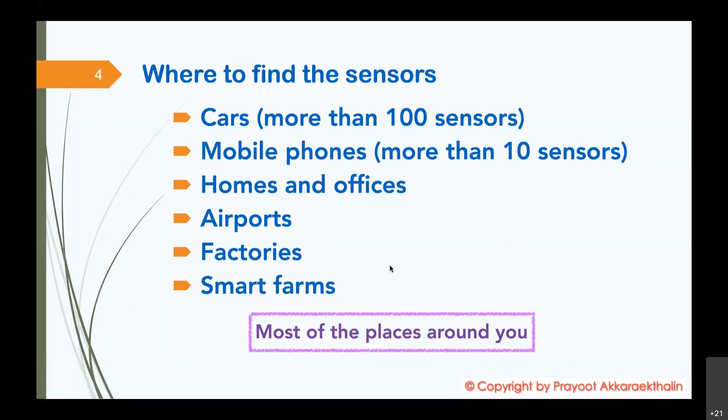You can see a lot of sensors around you: in your car, more than 100 sensors; in your cell phone, more than 10 sensors. In your home and office, for example in air conditioners and refrigerators, there are many sensors. Also in airports, factories, and smart farms. So you can see the sensor is very important, and that's why we are working on sensor technologies.

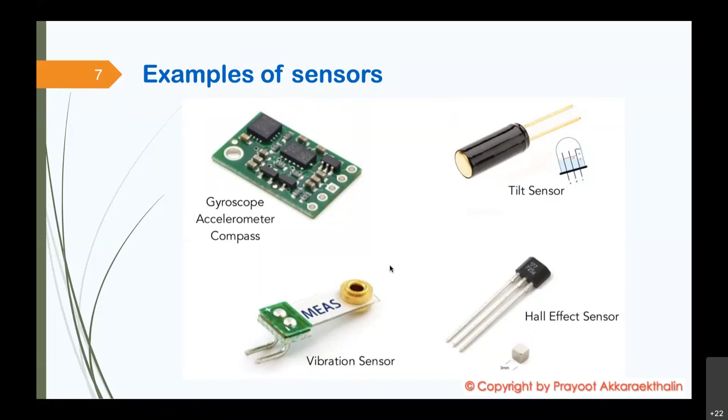So why do we need to work on electromagnetic-based sensors? Because the previous sensors I showed you all work on what we call a normal quantity of electricity, for example measuring electricity, capacitance, or resistance, and converting that to an electrical signal. That's the kind of conventional sensor.

The conventional sensor cannot do some jobs. For example, for long range applications, if you need to measure an object far away from the observation point, you cannot do that unless you run some electrical wire to bring the signal from the sensor to the observation point. For some applications, including high temperatures, you cannot put the sensor into a furnace, it will be destroyed. For some toxic areas, and also applications with a small amount of physical quantity, we have limitations with those kinds of sensors.

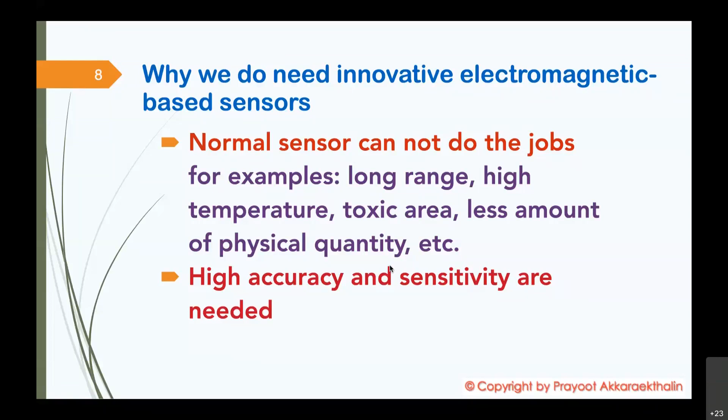Also, accuracy and sensitivity are very important for measuring in some applications, and those conventional sensors have relatively low accuracy and sensitivity.

I would like to introduce our group from Thailand. We got funding from the Thailand Research Fund from 2017 to 2020, and we study innovative sensor technology using electromagnetics. We have 9 researchers, I don't need to mention all of them here, and I guess some of them are also in this room. We have about more than 15 assistant researchers and graduate students.

We have a big project, and within the big project we have some sub-projects. For example, we have sub-projects for metamaterial-based gas sensors, nanofluidic sensors, waveguide sensors for material characterization, motion sensors, moisture sensors, GPR, and also RFID, including systems with IoT and wireless sensor networks.

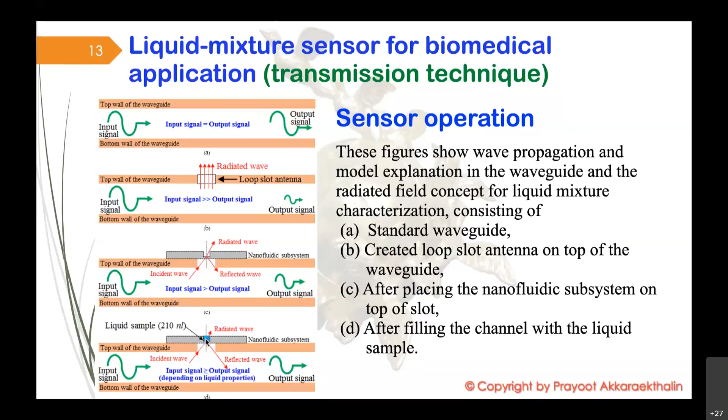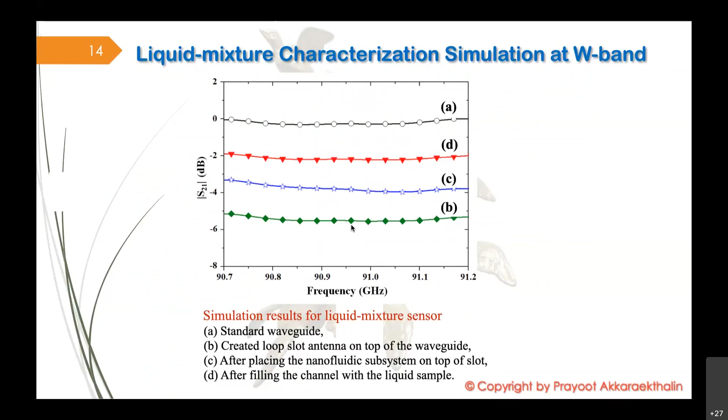And then we do some measurement. We design the sensor with a frequency of about 90 gigahertz, which is quite high. So we had to take this sensor to measure at the University of Leeds because they have the equipment to do this.

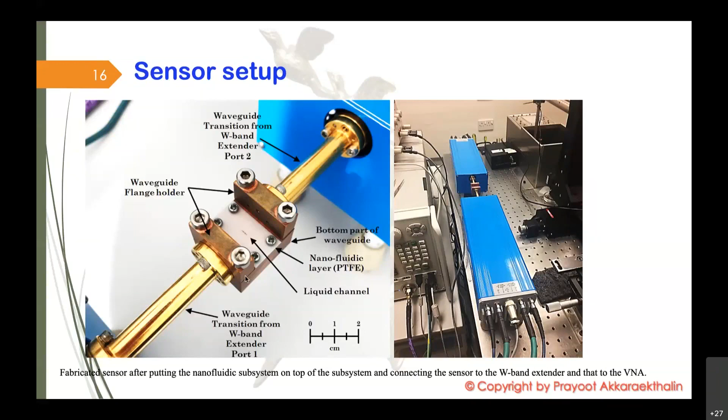And then we have the results here. The dots are the measured results. On this side is the percentage of ethanol—we use ethanol with DI water, mixing ethanol at different amounts or percentages into the DI water. You can see here from 0 to 100% ethanol, and we measure the value of delta S21.

And then we have all the data from the measurement. The red line is a fit plot, because when we finish designing this sensor, we need equations to use for future applications. That's why we need to fit the plot. The equation for the fitted plot is shown on the right-hand side here.

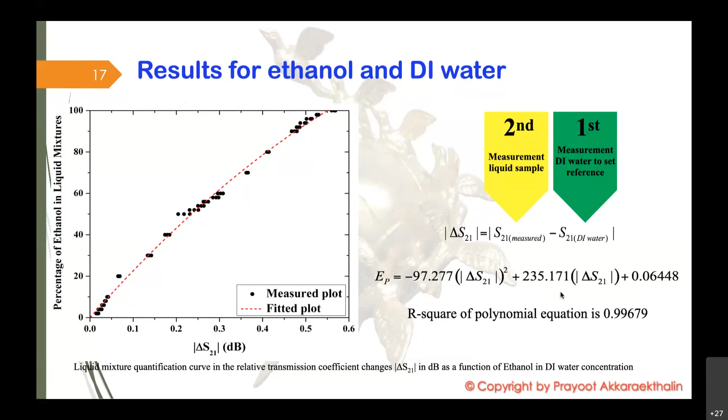So for the first sensor, we compared it with previous work in the literature. We found that our sensor has quite high sensitivity—about 2% sensitivity. The complexity is very low; you see it's just a piece of waveguide. We can make it reusable—we just change the nanofluidic subsystem.

So the reusability is very good, and also the cost is low, except the equipment, because this is kind of a prototype. When we make it for real application, you also need to design all the system with low cost. But now it's just a prototype, so we use equipment in the lab. I don't need to go into detail in the remarks because I've spoken out all the detail already, so I'll just skip this one.

Let's move to the second one, the surface height sensor for photoresist film measurement. This one uses the technique of reflection, meaning we measure the reflected signal and use resonance technique as well. So we developed a non-invasive sensor to accurately measure the thickness of photoresist film on the clear glass that's used for electronic process.

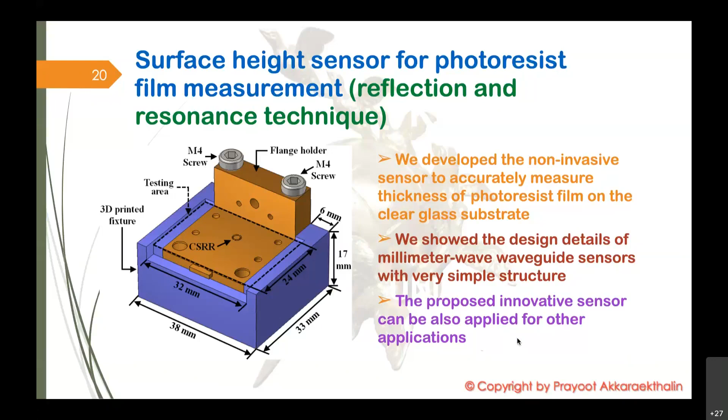We'll show the design in detail. We use a really high frequency in millimeter wave, so this will be useful for electronic process applications.

As you know, when you do some process of electronic devices, you have to put the photoresist on top of the wafers. This time we use glass wafers. The process here is we put the photoresist, SU8, on top of the clear glass and then spin until we get a kind of thin photoresist. The substrate has some properties here - SU8 has a value of permittivity. So for this project, we need to measure the thin film thickness here.

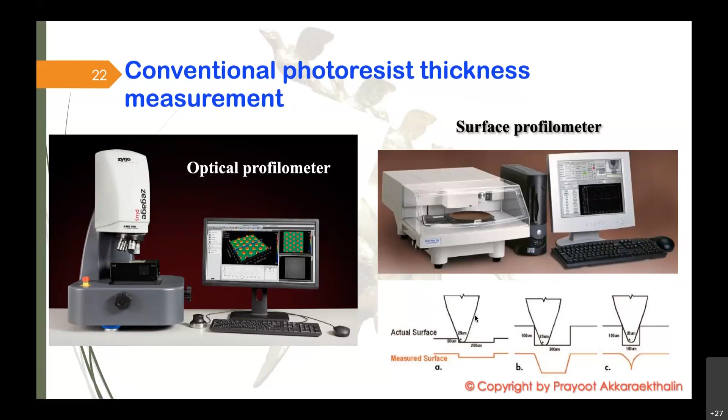Actually, we have some instruments to measure this kind of thickness. You may use optical profilometers, but the thing is, because this time we use clear glass, you may get some errors because it uses optical signals. The second one is you can use mechanical methods - you have a tip, and you can scan the tip on the surface of the photoresist. Also, the disadvantage of this instrument is it may destroy your photoresist somewhere on the glass wafer. That's why we have to make these sensors.

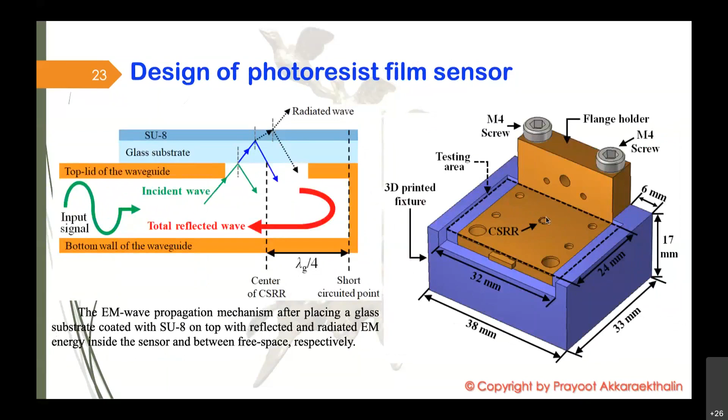We may go into some details. Going back to the structure here, on the hole we put a split ring resonator on top. The structure here is the split ring resonator - it cuts a hole to allow the signal to pass through to the photoresist.

So we studied this and then fabricated these sensors. You can see a piece of waveguide here, and on top we have the top lid with the hole, or split ring resonator - a circular split ring resonator here - and we make a short here, and this part is the input of the waveguide. We put a support here.

For the simulations of the photoresist, we measure the reflected signal, but at a different frequency, because when you put the glass wafer with photoresist on top of the waveguide, the signal reflected back shows some frequency shift - the SU8 photoresist changes the resonant frequency of the reflected signal. So the thickness of SU8 correlates with the variation of delta F, which we measure as reflected back from the sensor. This shows you the graph from the simulation.

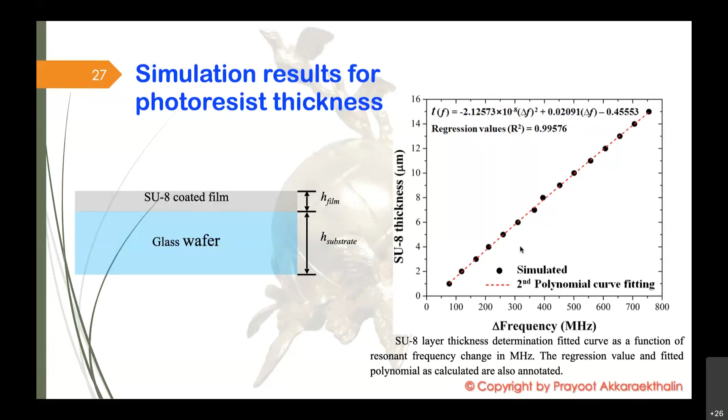So we did some experiments again. The frequency is quite high, about 80 gigahertz. We did this at the University of Leeds again.

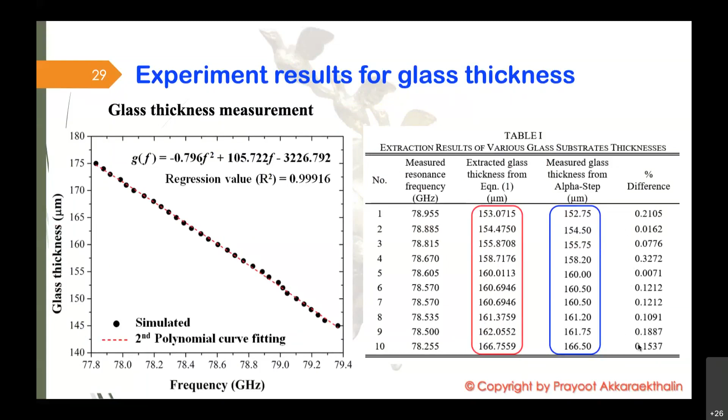From the experiment, comparing to the equations, we found that if you take a look here, this is the glass thickness - only the glass wafer thickness - compared to the equations. Let's show the equations from simulations and from measurements here. It's very close - we have only a very small difference between the simulation and measurement results. This also shows you the experimental result of the photoresist thickness.

So we move to the next sensor. This one we call a sodium chloride solution sensor, which may apply for industrial and biomedical applications. This time we use a resonant technique, again with a reflected signal.

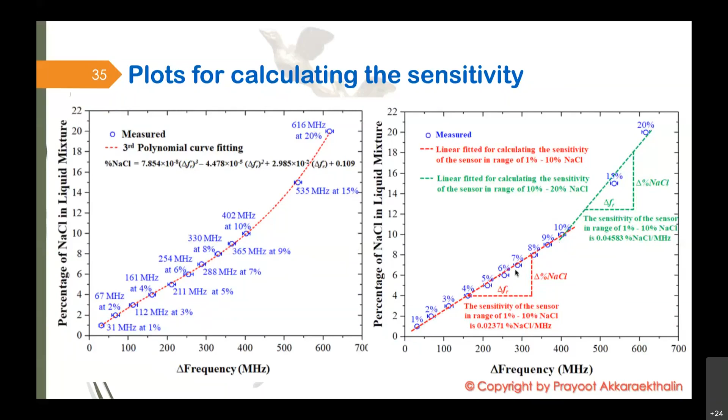From this sensor, we found that for the percentage of sodium chloride discrimination, we can get down to 1%. That's very good compared to previous work, and also the sensitivity is really high. Fabrication cost is quite low, and it has many good advantages compared with previous work.

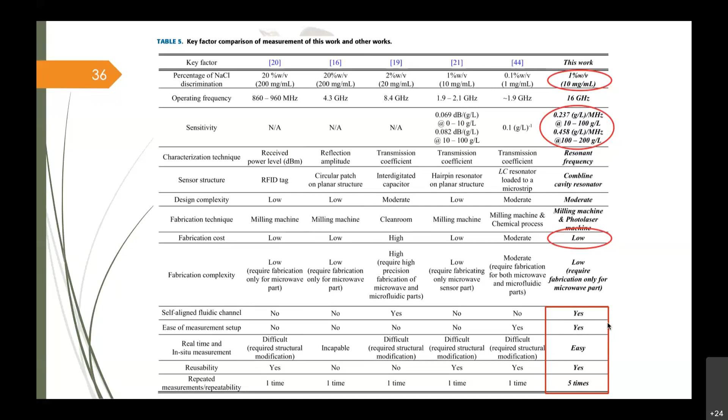So we finished 3 sensors, waveguide sensors. I think I have about 10 or 15 minutes left, so I'll go more quickly.

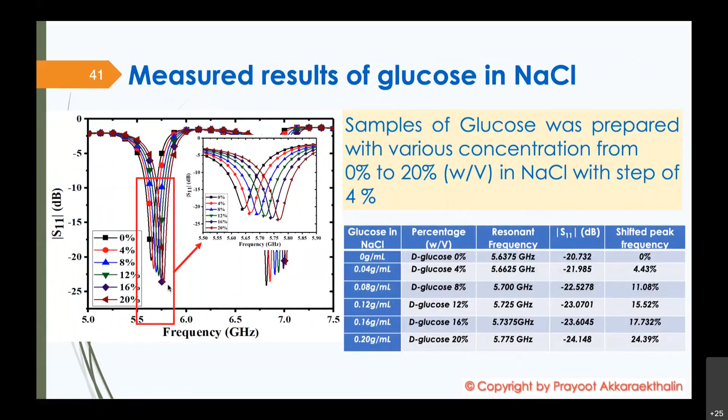Again, we can see the result here. The resonant frequency shifts depending on the amount of glucose. I won't go into detail for this one, just show you we also work on planar circuit sensors.

So we come to the last sensors, we call them rice paddy moisture sensors. Very important for Thailand because we are the number one rice exporter, milled rice export. Most of the agriculture area in Thailand, we grow rice.

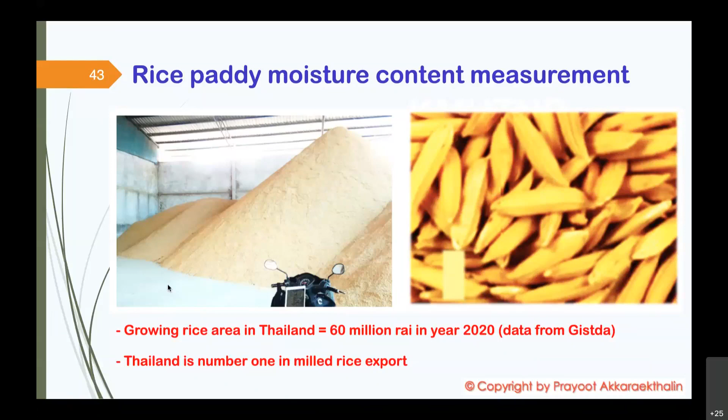So we need a sensor for agriculture and also for post-harvest processing. We will use a sensor for post-harvest processing. When we get the rice from the farmers, the moisture content in the paddy rice is very high, maybe up to 30%. We have to reduce it before making milled rice.

This card shows you the diagram of factories. We have a silo that will dry the rice. We put hot air into the silo and flow the rice from the top down to the bottom, again and again, until you get the moisture below about 10 or 12%, which you can use for processing milled rice.

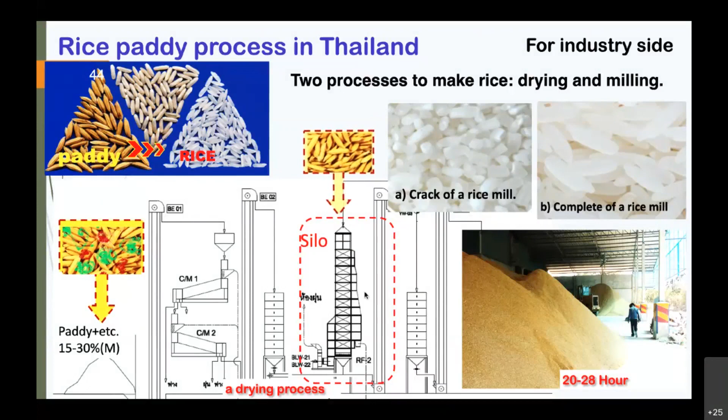So I'll go quickly. About 11%. Let me show you the picture of factories, the milled rice factory in Thailand. The right hand side shows a guy working on this project.

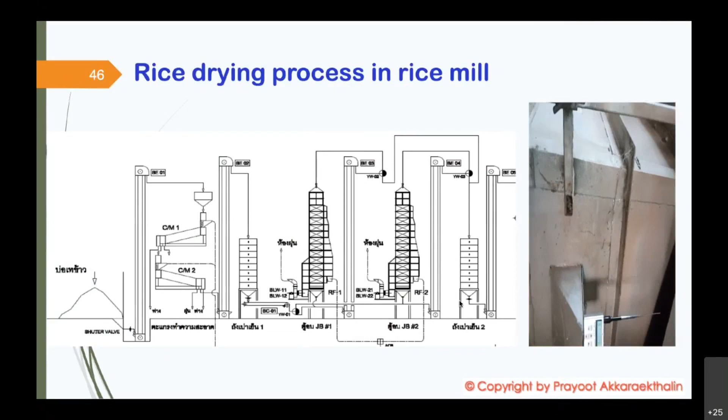I'll show you, we need to make the moisture content sensors work in process and real time, and we need to measure the data, put the data of moisture content via IoT. That's why we're working on this. We hope this will make the process for making milled rice more accurate.

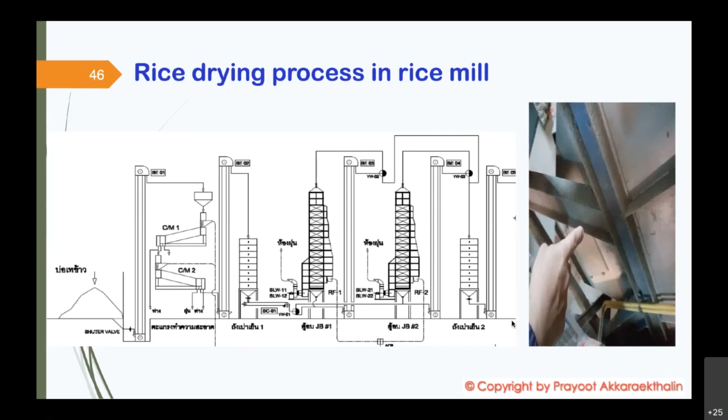Quickly, I'll show you some pictures of rice. If you decrease the amount of moisture content, from 20 to 14 you see more crack, right? Down to about 10, you see more crack here. So you have to be careful. If you reduce moisture more, you get more cracks, and that will destroy the milled rice, giving you a lower price for your rice.

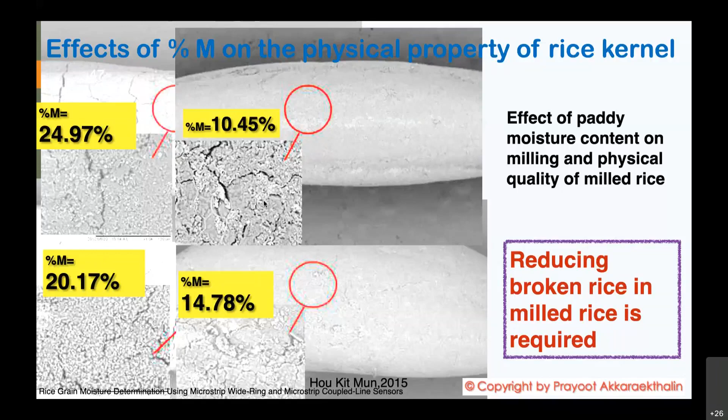Today we have standard tools to measure moisture content. We can use the capacitance technique, we can use a resistive technique. But with this tool, you have to take a sample from the silo and measure it outside, so you may get some error when you take the rice away from the silo.

So that's why we need to put the sensor just in the process, beside the silo, so we can measure accurate moisture content data and also monitor in real time.

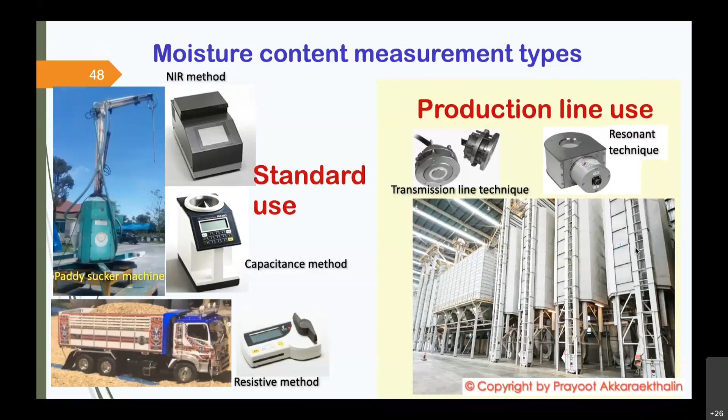Not smooth, wait a minute. Too slow. I'll go quick, but it does move fast. Okay, no problem, just some minutes and I can finish.

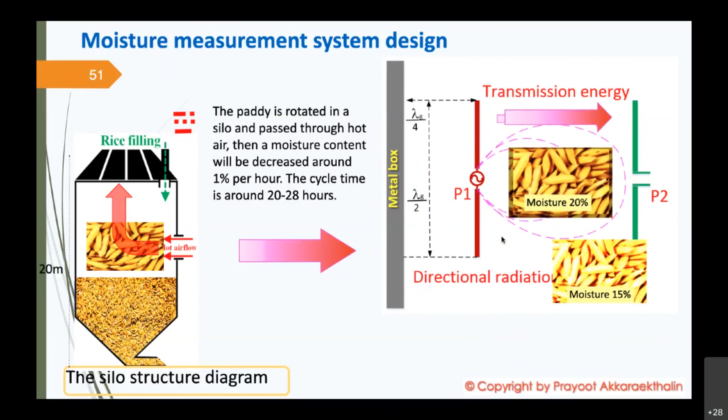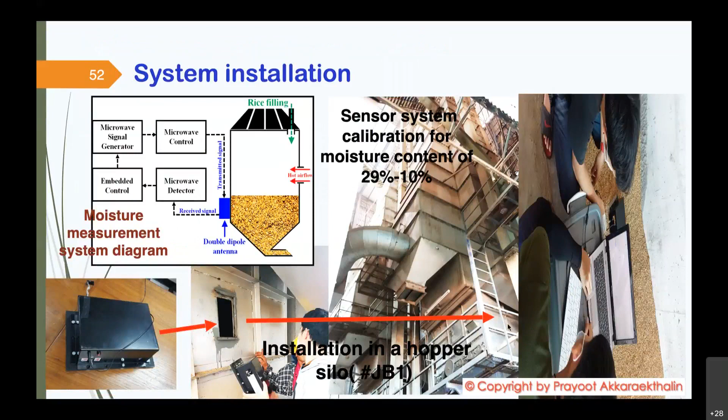Okay, this shows you the real system we put here. I'm sorry, somewhere here. I'll go quick so you can see how it operates, right? This shows you the real sensors.

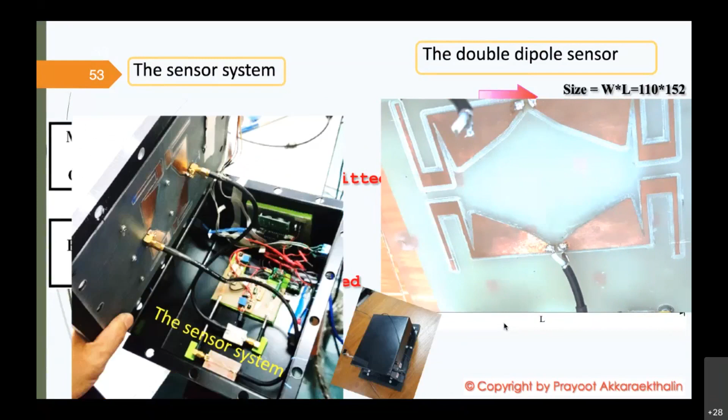Sensor system here. We measure the results of moisture content from the sensors and compare with the standard tool, and we have some curve for our system fitted from the measured data. So we compare here with standard tool, right?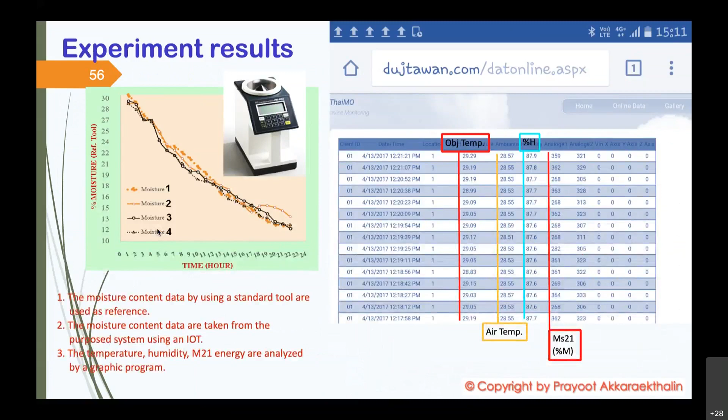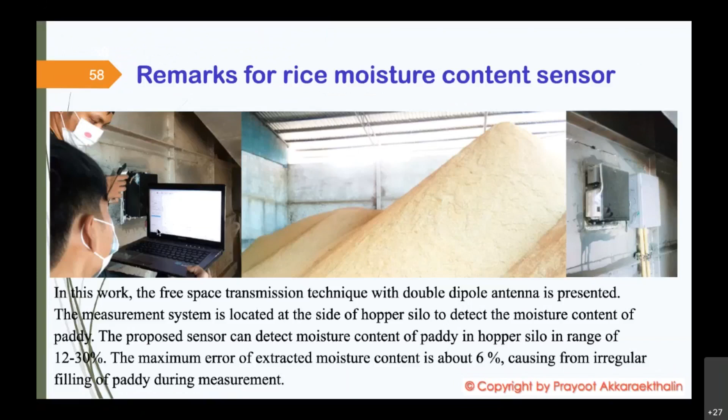We get some difference, we don't call it error. We got some difference with standard tool about 6%. So I would finish here, because the last one we use the same technique

of moisture content sensor to measure the moisture of soil at the restoration of a historic place in Thailand. But it's the same technique, so I'll go quick.

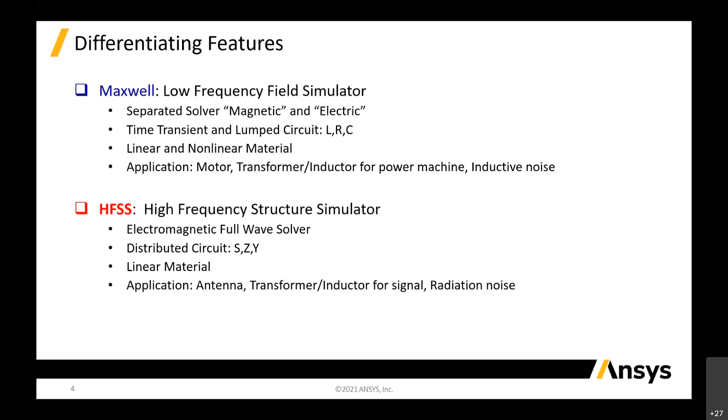So let's focus more on the applications we're going to introduce today. I'm going to introduce a sensor, an electromagnetic device that uses a magnetic field for sensing, where we detect the magnetic field of the sensing part from the coil. From there we analyze the different types of induced current, induced inductance, and how this data is processed, using our circuit tools and system tools as well.

Okay, I'll introduce it when we go on.

Velocity sensor for anti-lock brakes and stability control. Position sensor for static seat location. We have eddy current sensor for flaw detection, where you can have a sensor to detect cracks on surfaces. That's very important, where applications can be like aircraft or space shuttle. You need this sensor to actually detect cracks. If there are cracks on the surface of the aircraft, it's going to be a disaster when you fly out of the atmosphere, or the high pressure can cause disaster type accidents.

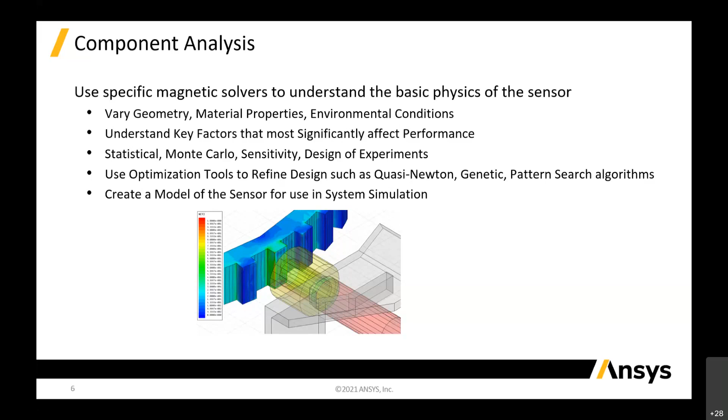So basically we have something called sensor design suite, where there's a series of related solutions that can assist engineers to design and analyze electrical machines. We have things like libraries and all that to support the type of design that engineers or the company require. Then we can integrate this whole thing.

It's a single platform that integrates circuitry, electromagnetic, and system engineering into one environment. We call it electronics desktop. It's just a single environment where you can call in all these components, like the way you design your structures, your device in Maxwell. You can actually connect them into circuit and all this. So it's actually all fully integrated.

Then the solution that we provide for low frequency, as I mentioned, we have Maxwell 2D and 3D. It depends on the structures, because you might want to start out with 2D, since the electromagnetic field is basically static, in one axis or two axes. So you can start out with 2D to try to analyze it and see the effect for your design. Then you can easily convert that 2D into 3D inside the solver itself, so you can do that through and through.

Then, of course, from there you can do a steady state solver using DC or frequency domain, or transient dynamic solutions for time domain, handling all this time-induced eddy effect, because this is AC current when it comes to eddy effect. So you can have steady DC for the steady state solver, and for the dynamic solver we can use AC. These come with different types of applications for different types of solvers, so basically it's all in a single platform.

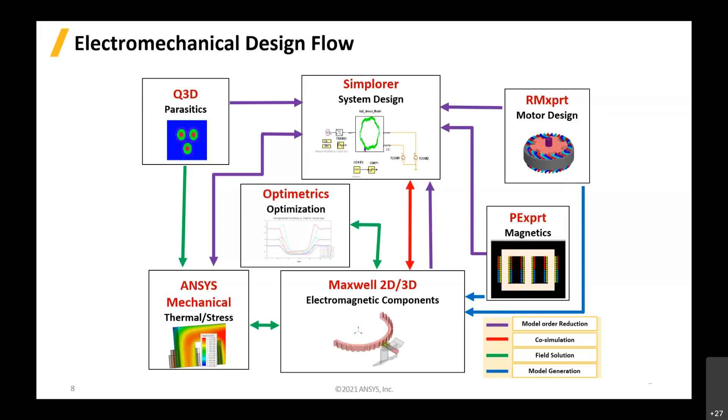We will have an example later on to show you what this looks like. These are just slides to show you how the system platform looks.

You see the Hall sensor models there, and the Hall sensor simulated in Maxwell is just a passive component. After you analyze whatever characteristics you want on your Hall sensor model, you can put it into Simplorer and run it with a simple current flowing through, seeing how the thing rotates and extracting out the magnetic field. So this system will be a subsystem for control of this Hall sensor.

Then this subsystem of the Hall sensor can plug into total simulations with feedback control - for example, this sensor might be for the rotating wheel of your vehicle, to measure the speed and all that stuff. We can put it into the system level, then analyze it and see how the sensor works on a real virtual rotation of the wheel itself.

Then we can have this rectifier circuit to power up the sensor. We know that a Hall sensor has an IC chip inside it - this IC chip, wherever you need it, is just for simple current sensing.

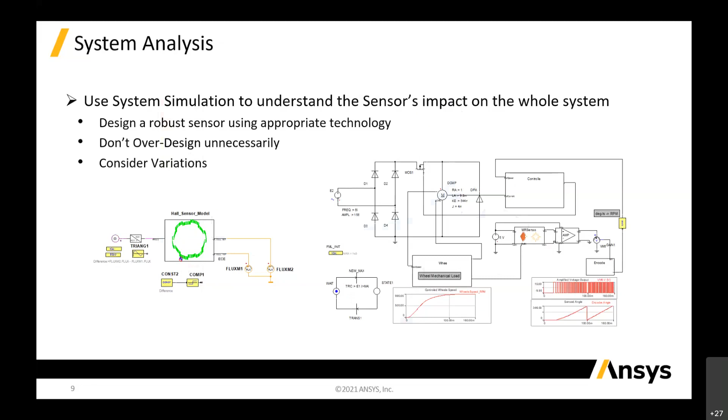Maxwell is a 3D solver, a solver that actually solves separately for magnetic and electric. There are two different solvers, and you can solve each of these solvers that you require for your applications.

Maxwell is very simple. You need to have your 3D structure imported into the solver, with the material characteristics that you assign. It's like the actual thing you design in the real world, and you just put it into the simulation.

As I mentioned, there are different types of solvers: electrostatic, magnetostatic, eddy current - three types of solvers inside Maxwell. Depending on your sensor's behavior or characteristics, you can use different types of solvers. There's also transient electric, and the last one is transient magnetic. These are all AC, DC and AC, but with separate solvers for electrostatic and magnetic - one is to analyze voltage, the other is to analyze current.

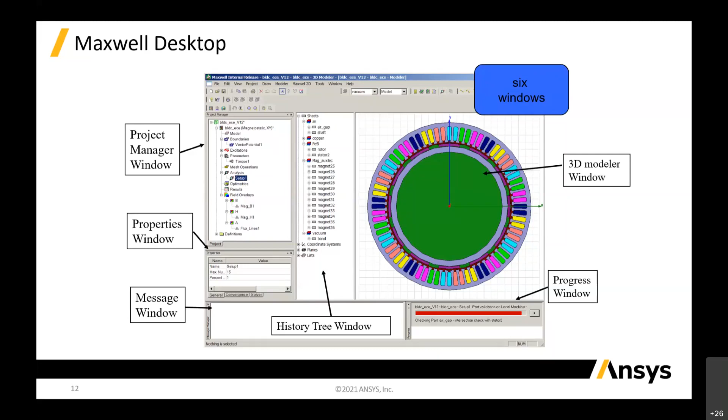For 3D solver simulations, the most important things are your geometry and your material. After that, you just assign boundary conditions and excitation, and it's that simple. But of course, you must know how to assign your boundary and excitation correctly.

For this solver, we use a proprietary technique called automatic adaptive meshing. What it does is let you put in a criteria for meshing based on your volume loss or magnetic loss that you want. We have a default value, but you can put in more constraints, like less than 1% of error.

When you start off, this is automatic meshing, but the solver's GUI also allows manual meshing. For electromagnetic work, you need to know where to mesh in order to get the correct result. In Maxwell or HFSS, we have automatic adaptive meshing, where the solver smartly knows where it needs to mesh based on your excitation. It identifies where the highest fields are and makes a denser mesh there, so your refined mesh is more accurate when it comes to results.

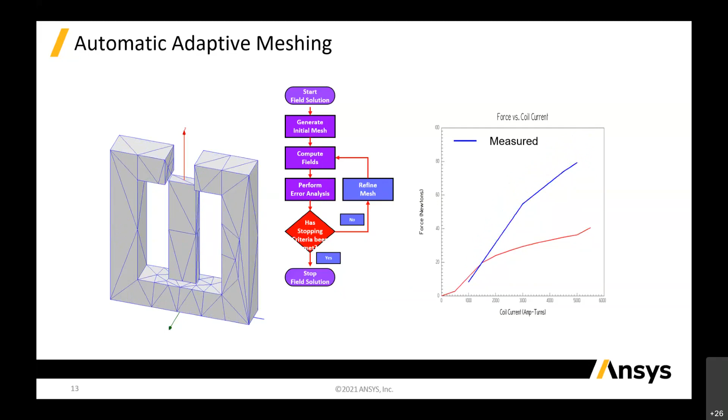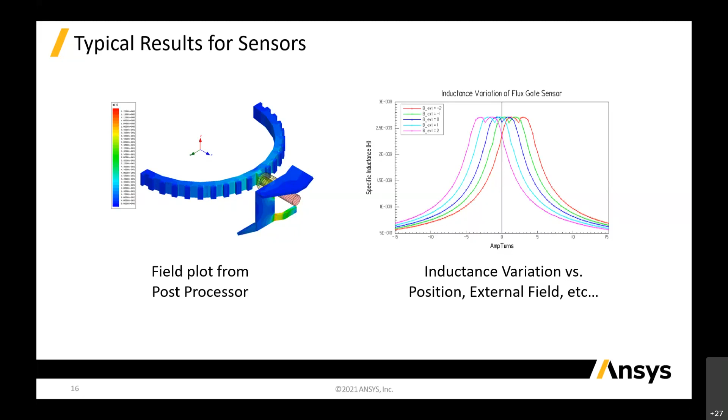You can plot, by doing parameterization, like moving the teeth of that rotation, the difference between the inductance induced inside your coil, and how the inductance shifts with different types of current flowing through. Like in this case, a flux gate sensor - you can see how the inductance shifts when it senses different types of currents, different currents excited from the external field.

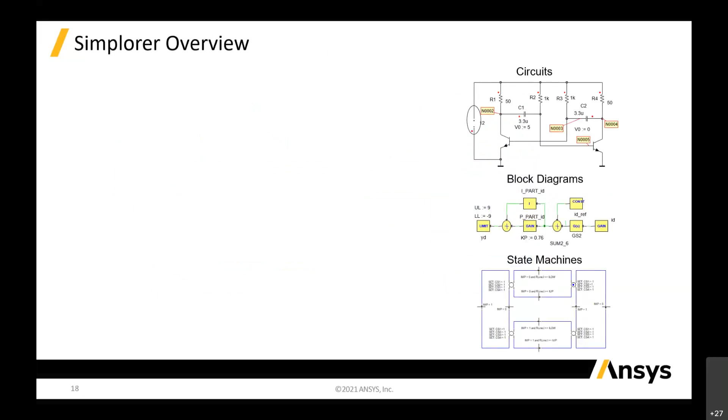So Simplorer is basically a system simulation tool. Just to give an overview, we have different types of solvers inside there - we have circuits, block diagrams, and state machines.

For circuits, if you have your circuitry, you can use the components inside the circuit to connect up the components, and with driver circuits you can drive your sensor. If you don't have that circuitry but have a SPICE model, we can do that too inside Simplorer. But most of the time, customers or vendors designing sensors might not have all this circuitry, or might not have the privilege to get that type of circuitry from customers, because it's proprietary.

So what you can do is, if you know the condition of how to turn on the sensor, how to switch it on and off, you can address your circuit by using block diagrams. Block diagram is like digital diagrams where you can do on and off, or apply a gain, or do something linear - these are more mathematical types of blocks where you can represent your circuitry.

These are more simplified, but at least you're able to use them to do your system simulations. So we have block diagrams inside Simplorer as well, and state machines too. State machine is like a coding machine where you can do coding, and by setting conditions, activate some of this circuitry where required to assess your sensor and see its performance at the system level.

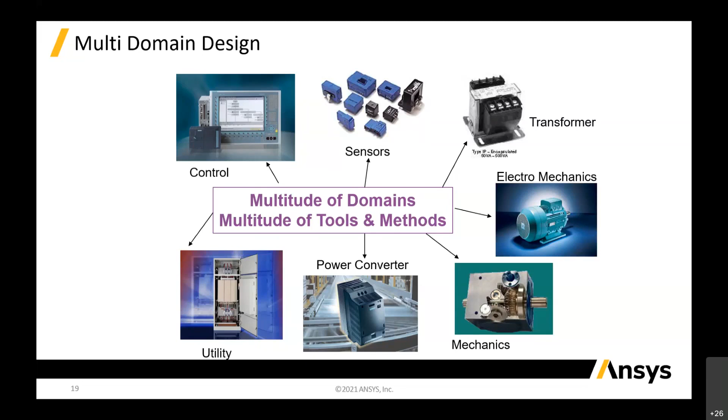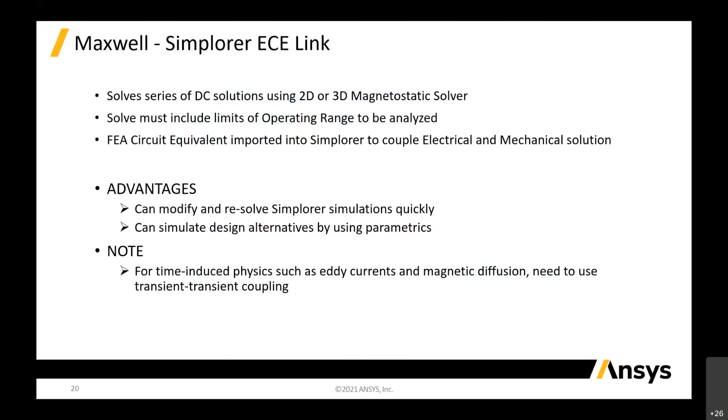And this is actually ECE Link, basically to link to your 3D Maxwell solver. So this is just an integration between your Simplorer and Maxwell. Nothing much, you just bring your model into Simplorer and connect it up inside Simplorer.

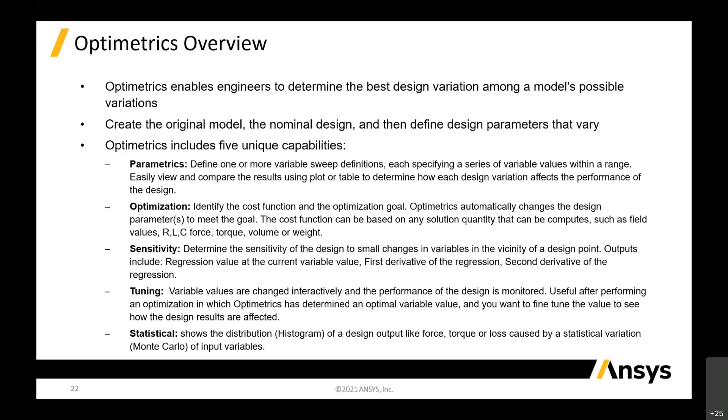Then statistical - you can do a distribution. It's like QA, you do a distribution like your design output, like your forces, your torques, and your losses - your core loss or your magnetic flux gains and all that stuff. So you can do a statistical analysis as well in your models.

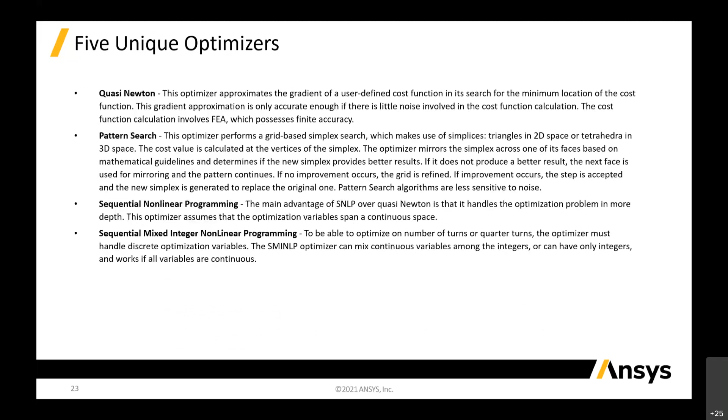I will not go through all this because these are some of the algorithms that we use for your optimization. You can choose to optimize based on this algorithm called Quasi-Newton, pattern search, sequential nonlinear programming, sequential mixed integer nonlinear programming, and genetic algorithm. So you can choose different types of optimizers, but this optimizer is based on certain applications sometimes, or based on certain algorithms.

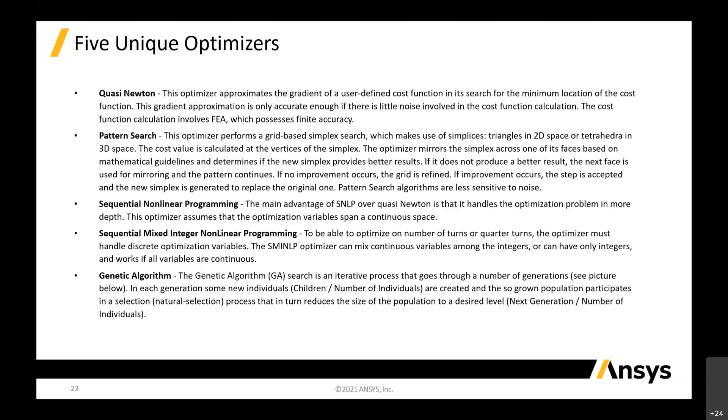You might need to study them to see which is the best, but by default it's Quasi-Newtons, which is very general. Then the rest you can look up and see whether some of these things might be more appropriate to your design, so you can use that type of optimizer.

Let's go into some automotive applications for sensor automation. Let's start with the Hall effect sensor. It's a speed control sensor, and we all know it determines the flux crossing the 3D Hall effect sensor.

This is run in Maxwell. You can see that when the wheels rotate, the gap between the sensor and the wheel can be parameterized. On the left hand side, the sensor can be parameterized in terms of the gaps—it can be far away or nearer—so you can optimize the best location to place that sensor.

Then you can rotate the wheels and see the effect of this magnetic flux crossing the sensor. This sensor has a permanent magnet, pole piece, and Hall sensor. The Hall sensor itself comes from an IC chip. We won't simulate the IC chip here, but we can put the IC chip inside Simplorer. So basically we are working on how the magnets are affected by the magnetic flux as it passes the 3D Hall sensor.

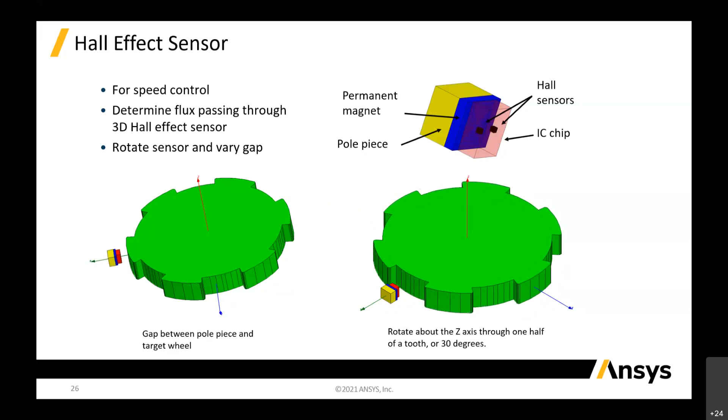From there you can see the magnetic field, and we call it the ECE Connect link—it's actually a dynamic link into Simplorer, putting the whole sensor inside there. Then from there we can build out the system. I'll show you in the coming slides.

So with this Hall sensor, you can plot out the flux and see different types of views on the axis itself. You can see how the flux flows and whether it's optimized, and where it's not optimized you can do parameterization plus optimization to optimize your structures.

We can also see the field in the IC and the Hall sensor, the normal between them, and the different time axis of the field effect. You can actually know and realize where the field flows and whether it's correct in the way you place it.

The animation also shows you something very meaningful, because it's something you won't see in your measurements or in the actual device. You only see data coming out from the actual device, but in simulation you can see more—how the magnetic flux is induced inside the wheels, and how the gap affects the magnetic flux between the wheels and the Hall sensor.

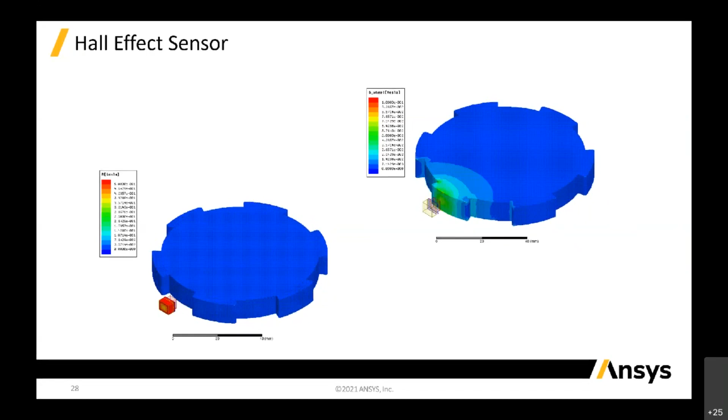And of course we do a parameterization between them on different angles or different gaps. You can see how the flux is induced in between the spacing of the gaps. You can plot out this graph, which is very useful, showing the flux characteristics between all these gaps. This allows you to design or optimize and fit the applications your customer wants.

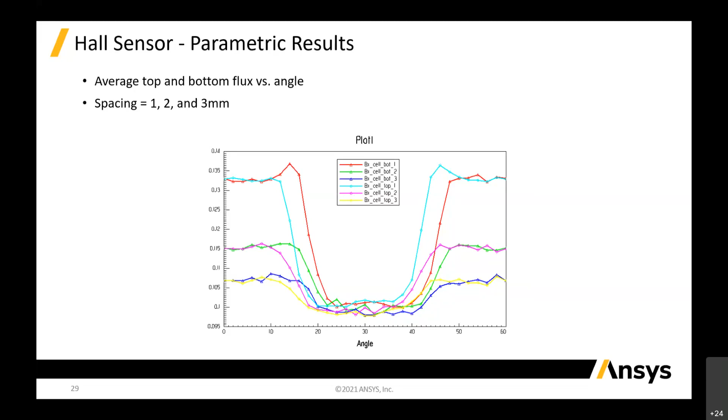So let's go into the system level. After designing the Hall sensor, you can do a link into your Simplorer. This is just a subsystem—why subsystem? Because to activate your device by external drives, you need currents and other things to actually power it up. So in this case we're using a control block to do it.

It's easier—you can even use a control block with an equation to analyze what current you require as a source. You can analyze it with equations and import that into your 3D models, and then from there you can have different blocks and see the characteristics and control on the gap itself.

You can see this is like a device, a chip device that is being actively powered up. When you go into that, you can see with this signal whether the differential signal is being detected—whether if the space is 3 mm, the differential signal is too small. If it's too small, you won't be able to detect it properly, so 3 mm is not going to be a good gap spacing.

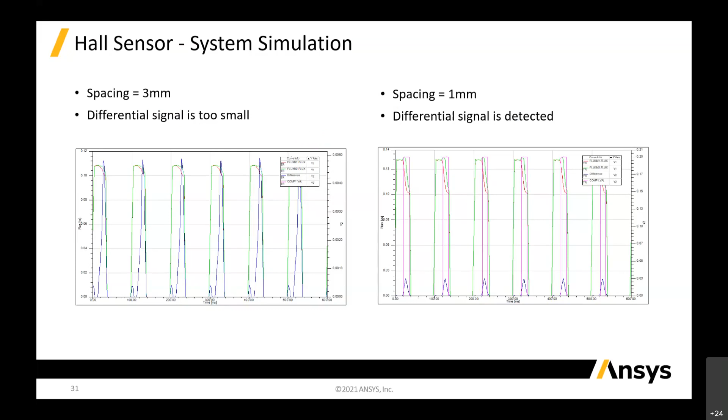If we become 1 mm, that will be detected. So you can actually parameterize between 3 to 1 mm and see what is the optimized one. You can work out inside your simulations before you go into your actual

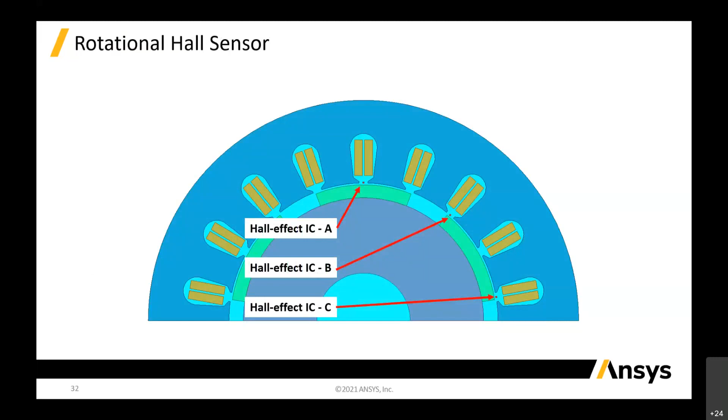putting into a real environment to test your sensor, you can actually put into a system level to do it. This is a rotational Hall sensor where you have different sensors inside that rotatable. You can see the Hall effect for IC A, B, and C, different sensors that we can put into a system level.

We put that into the system level using block diagrams. As you can see on the side here, we can represent Hall IC A, IC B, IC C into block diagrams, and from there we can categorize in the block diagram to come up with the source that you required.

Companies don't design the IC themselves, they just buy the IC and plug it into the sensor and design the sensor. So for the Hall sensor, the IC part could be from vendors that they buy and just plug inside the design. The vendor can give them a SPICE model or different types of characteristic models. If they can't, you can build that in block diagrams and check what you need is just the source from the IC.

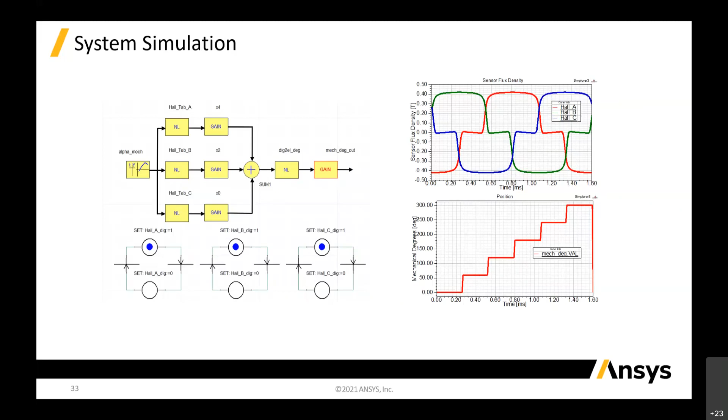This is all very useful information for a designer, to see what the materials are, especially different types of magnetic materials, and how strong the flux is and how it's induced into the environment.

Then the next sensor - we'll go into maybe 4 different types of sensors created using our Ansys tools. The next one is the variable reluctance sensor, where the resistive part is from the magnetic field. The change of magnetic field actually changes the resistance under different conditions. From there we can use that as a sensing part to process the sensing results.

It's for the sensing data that's required. There's a lot of sensors for different applications, but there can be different types of sensor for one application, like speed control. It depends on what type of condition is required - inside a car, an airplane, whatever. Sensors can be for military, commercial, or even small domestic stuff like a fridge inside our home. So different types of sensor might be using the same application, but it depends on the product requirements - more expensive sensors are all in the market.

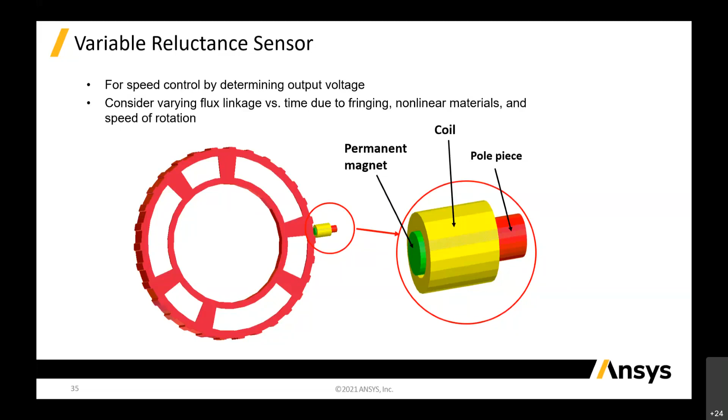This is the variable reluctance sensor, also for speed control, by determining the output voltage. It considers the flux linkage versus time due to non-linear materials, fringing, and speed of rotation. It consists of a permanent magnet, coil, and pole piece - south pole and the magnet itself. It's placed close to the wheel you want to analyze, and the gap is also important for these characteristic variables.

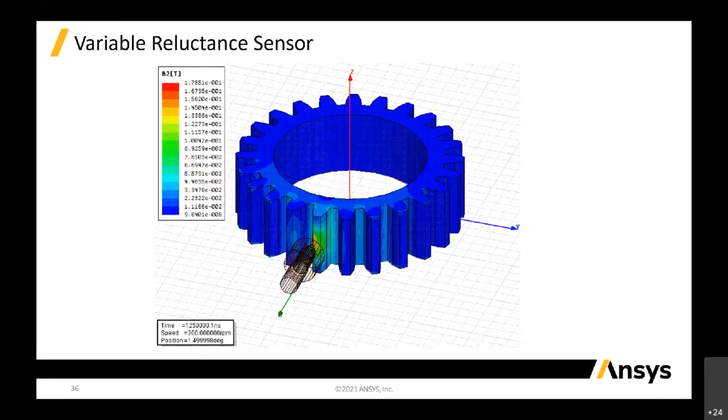You can rotate it and see the flux induced between them changes - that's the resistive part of the magnetic field changing. This allows that type of change to be converted to voltage.

This characterization in Maxwell of the variable reluctance sensor is imported into Simplorer to build a small drive circuit to drive this sensor. We have source components and resistor components that we can plug in and connect into this 3D sensor component. From there we can analyze the angle versus time, and also the output voltage versus time, and see how this thing moves.

So whatever you have optimized inside a device will be monitored here, in terms of your voltage and your angles.

Then the next one is magnetoresistive sensor. This is a more complex one. The application is more military-oriented, right? For this case, it's a speed control for gear wheels.

Basically, what it does is it's based on the resistance change with the angles of this magnetic field that crosses the direction of the current. So when this magnetic field changes, the current flowing through senses that type of resistive change, because the current flowing through and the magnetic field is actually distorted on the teeth of the wheels, so this change reflects to the resistance.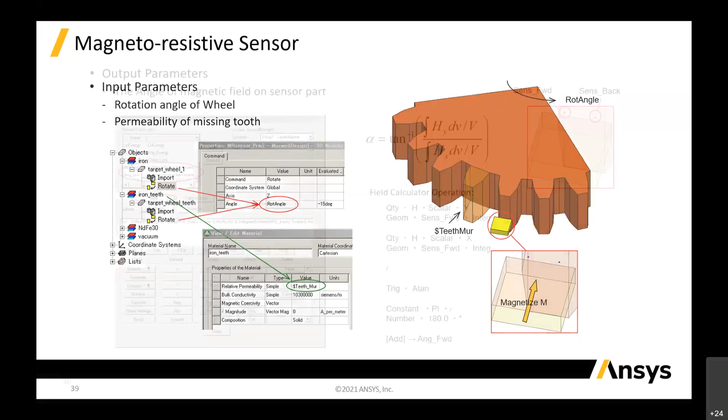In Maxwell, we have something called field calculator, where you can calculate certain points of the structure that you want, like alpha tangent, we want to get the alpha. Based on the equation, R equal to R naught plus delta R cosine squared alpha, we can plug this inside the field calculator.

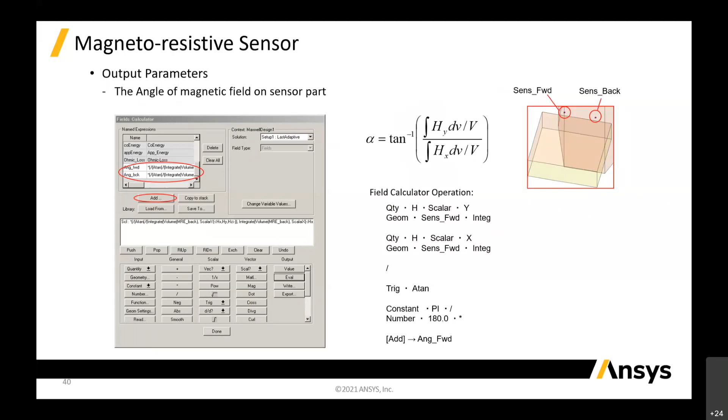The point or geometry can be a line or a cutout face to calculate the volume or the scalar of this alpha. You can plug the equation inside there and calculate a single value that you require. This single value can be parameterized across different steps, and you can collect all this data and plug it into this so-called lookup table.

And you can export this lookup table. This could be a bit manual, but what it does is you export these tables and manually process them inside a tool like Excel to analyze the data, formalize and process it, then export back into the import table and put it into Simplorer to run at a system level. So this is some of the flow we can do at the system level using Simplorer.

And as usual, we can plug all this in and see. So you can see that this sensor, magnetic sensors, the applications and structures could be the same, but the analyzed part could be different. You can use Maxwell to analyze all these characteristics.

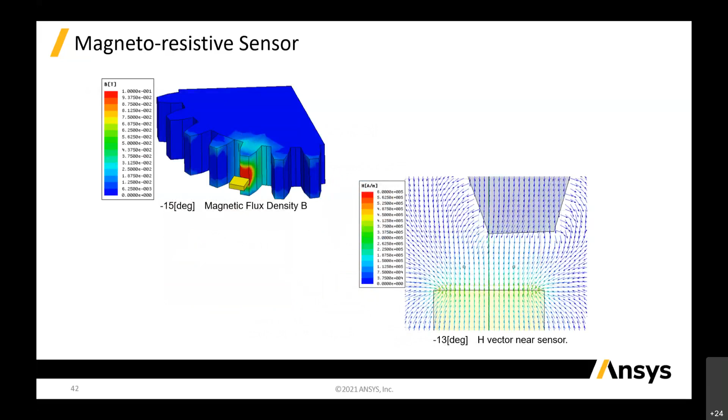Also, the alpha and the missing tooth, from 15 degrees to 30 degrees, you can see the sinusoidal field, the sinusoidal curve that you plot inside Maxwell or inside Simplorer. It can be a different type of shape and you can analyze from there.

So you see here, same thing, the MR sensor, which is what we did in Maxwell. We can connect it into Simplorer and drive the sensor, and we can drive this by 5 volts, and we can have an amplifier to amplify the signal, because whatever comes out from the signal is very small, in microvolts or even smaller.

So basically what it does is we need an amplifier circuit to amplify it, but at the same time we can convert that signal into a square wave.

So basically it's a processing of that signal from the sensor to make it more useful data. You can see on the left hand side, there's a block that we have with some different levels of hierarchy.

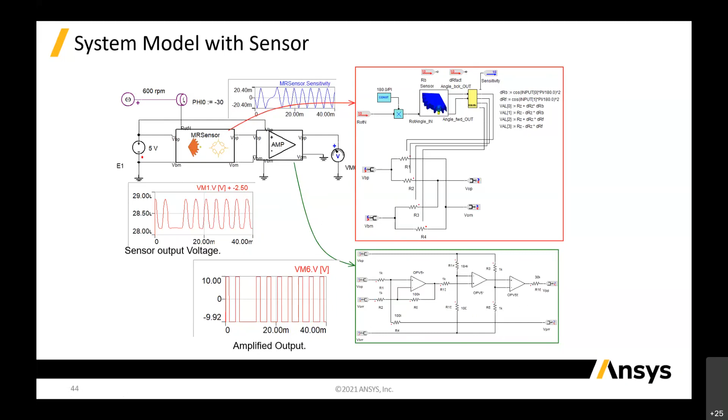Inside this MR sensor block, there are some driver circuits. Then we have the amplifier. We actually build the amplifier circuit, and you can block it and make it a library, and plug it inside here. So you can have different level types of design inside Simplorer to drive the circuits, to drive the sensor.

When this sensor is built, you can put it into any applications, like speed control or other sensing applications, as long as you know what the environment is like. For this case, it's a wheel, so we can have a mechanical wheel load inside Simplorer, and we can build the amplifier circuits to rectify the signal into the controller. This controller is actually a block diagram to control the speed. Then after that, we have a feedback loop that can build that. So basically, you are designing the sensor, but you can build it into a system level to control your sensor and see what is the characteristic and performance of this sensor inside a real system.

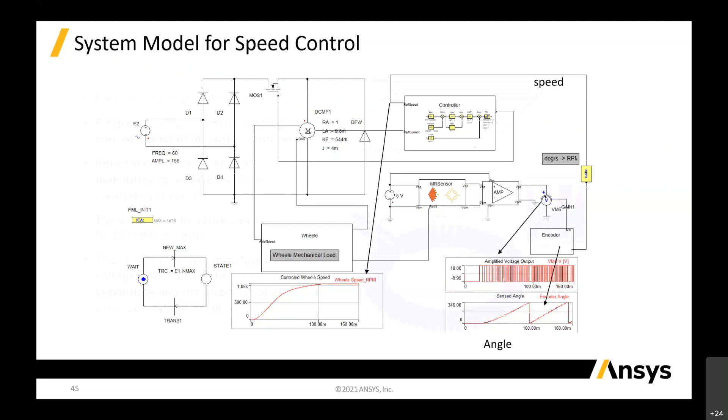The next one is a flux gate sensor. I'm not going through the theory of how it works, but basically it's more on the tools itself.

Flux gate sensor basically makes use of this linear response characteristic of the saturation between the B-H curve. So it's through the flow of this B-H curve, from a linear point of view, it can be like higher inductance or lower inductance between saturation. So the sensor drives between this region, the linear and saturation region, for this B-H curve. This is just the basics for this flux gate sensor.

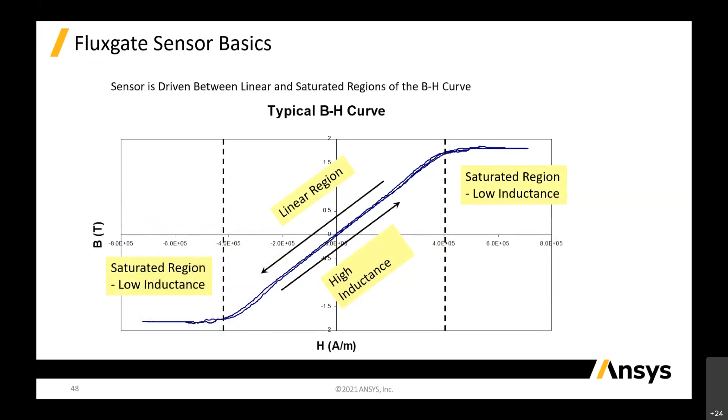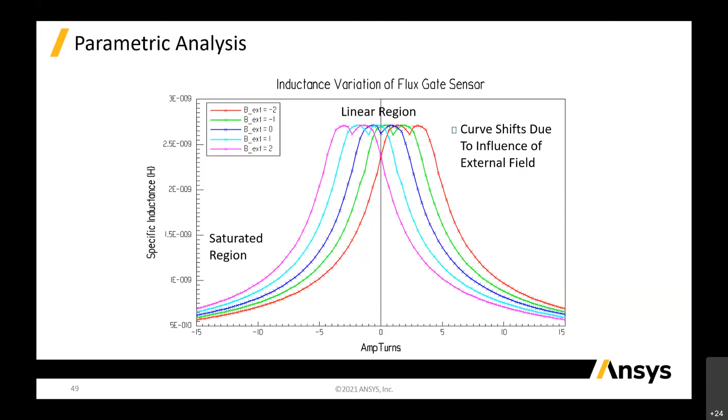When this runs, basically what changes is the inductance. The curve shifts due to the external field. So when there's an external field passing through this device, this sensor, there'll be a shift in the inductance. When this inductance shifts, we know that there is a magnetic field passing through. It depends on the strength of this magnetic field, there will be different shift levels. So from there we can do data processing, understanding the requirements of how to process the external field into real data.

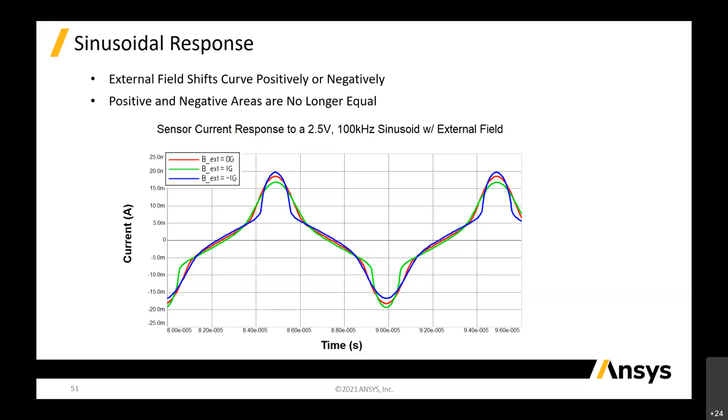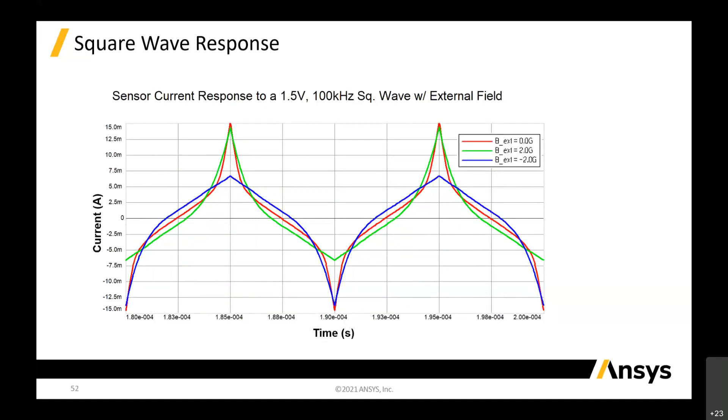So if you see that when there's a 2.0 and minus 2.0 flux density, then you can see that the plot is different for the green and the blue. This is how you differentiate that type of signal passing through the flux gate sensor.

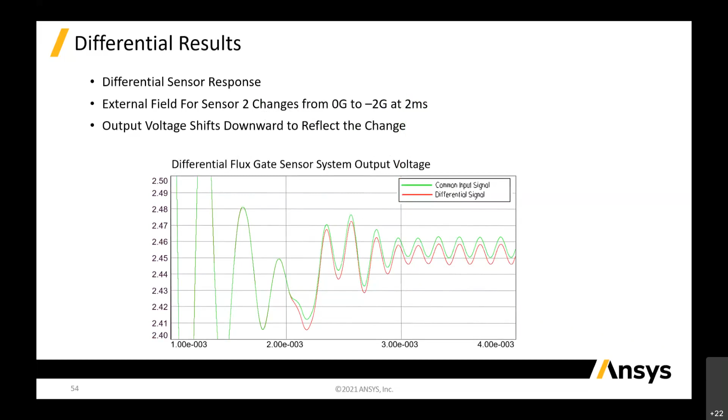I think this is my last slide. Basically, what I'm trying to convey today is Ansys does have solutions for all these sensors, regardless of low frequency and high frequency. High frequency is just, as I mentioned, to analyze the antenna, and the antenna can be powered up inside the system level simulation as well.

So actually, what I do here is we provide some examples. This sensor can be used for speed, position, and phase sensing. Optimization and coupling physics solutions can be done.

This isn't mentioned here, but if you're interested, we have solutions for putting this into thermal and stress, because when you do a system level simulation, it's in an ideal condition.